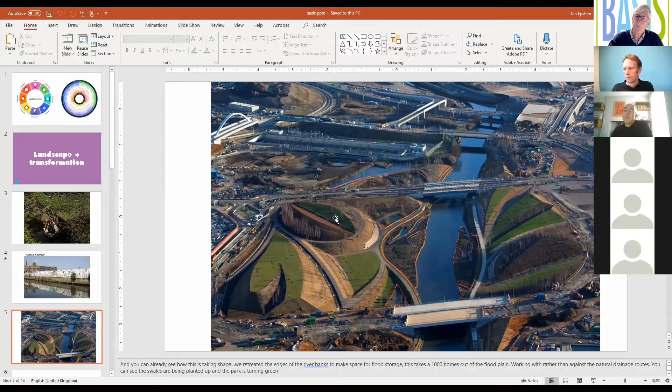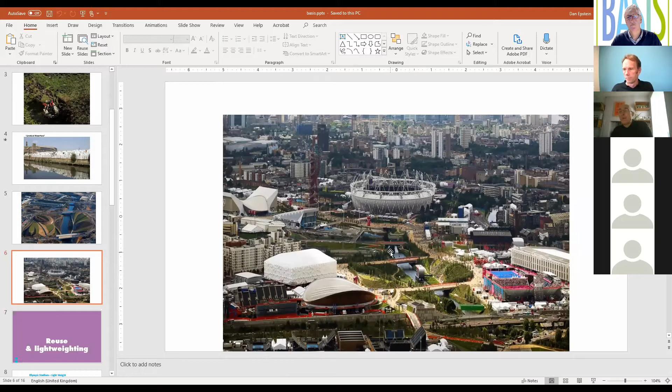It's connected, it draws people from all over the world. So it was really transformative, and that's an incredibly important part of this, the health and well-being agenda. And this is the backdrop for what I thought was a really successful Olympics—the park itself, the great legacy. So where better to put great sporting facilities than in the middle of a fantastic, vibrant park?

How do we build so it's really lightweight? This red outline is the Beijing stadium, an 80,000 seater stadium. The black outline is the Populous Stadium for London, also an 80,000 seater stadium, but it used a quarter of the materials. So we know—and Eva will talk more about this—we know we can build in a much more lightweight, but also much more robust way.

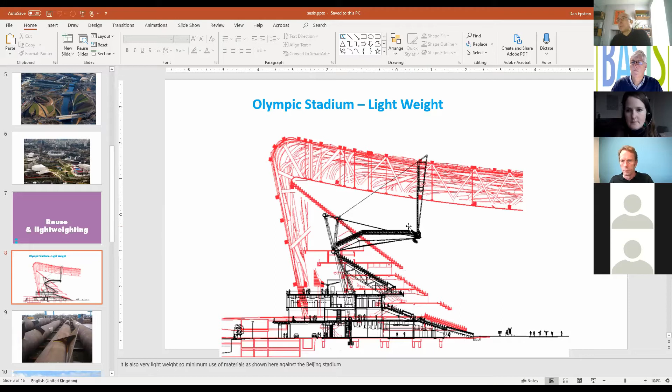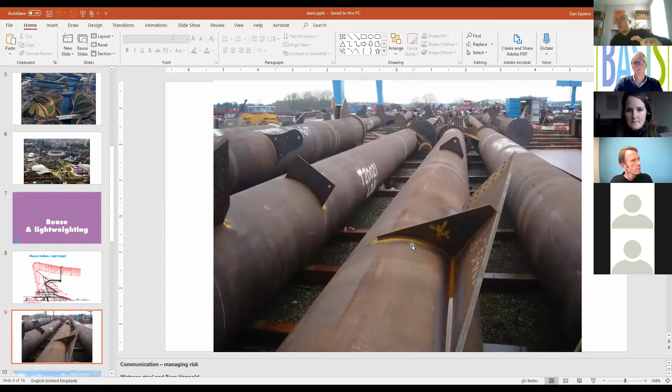It costs far less. We also managed, on the Olympics—and this is something I really think we need to think harder about—to require that 20% of all the materials we used would come from recycled sources. Here are some old gas pipes which were surplus to requirement, and they ended up being used in the ring beam and the exoskeleton for the Olympic Stadium. We reduced our carbon emissions and reused a huge amount of materials. That was just innovation and good design.

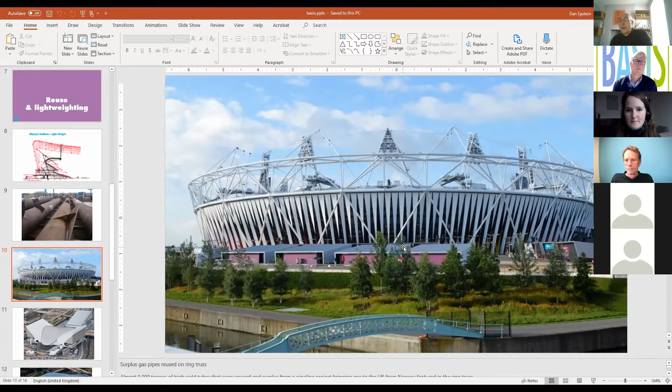Here we designed an aquatic centre with 17,500 seats. That's a requirement of the IOC. But afterwards, you look around the world and you only need 2,000 seats. So we designed it so those two wings could be taken away.

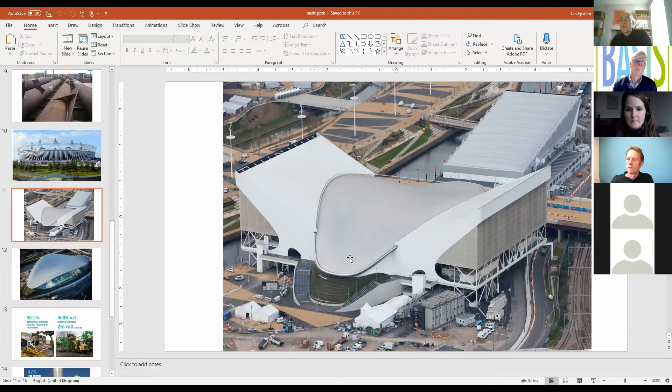And now they are part of the whole events world, where the seats are taken and used for temporary events, sporting events, and other cultural events around the world. They were designed particularly for that. And this is what we end up with, a venue which is brilliantly used by the community.

It's really hard over the last few months during COVID to book a place to swim at the swimming pool because it's so popular.

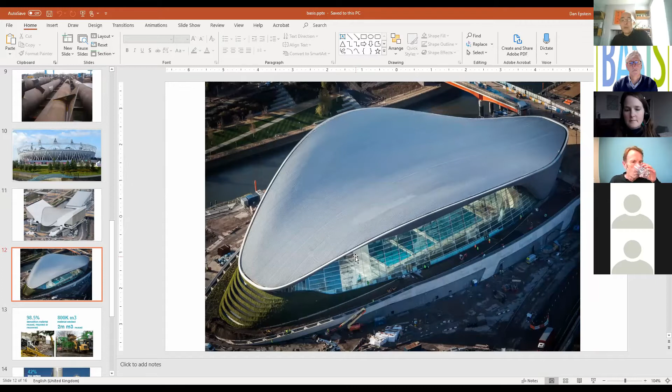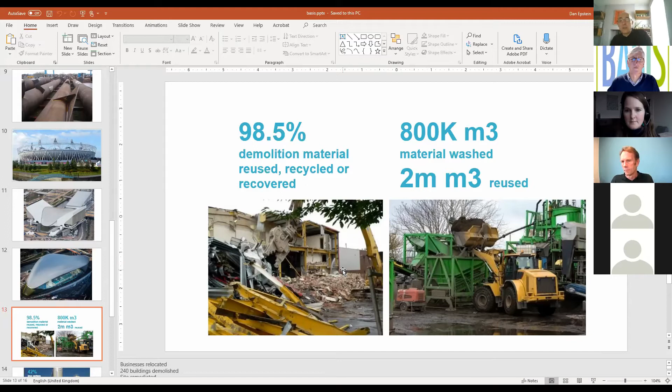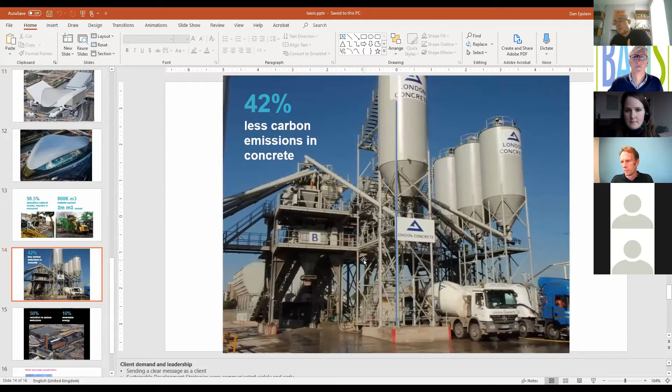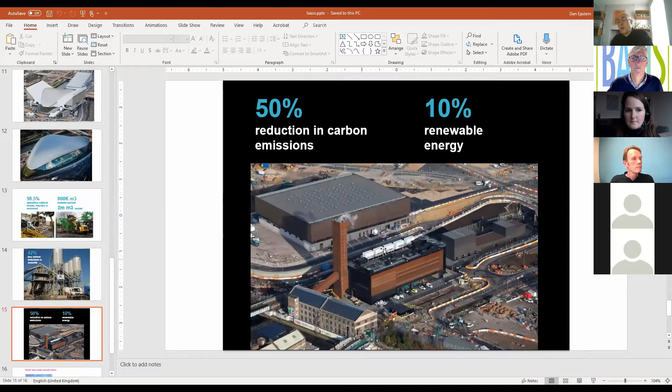We managed to create a heat network that uses free heat from biomass to provide heating, cooling and hot water to all the venues, and we used recycled water across the park. All these innovations and more were part of a whole ethos around how we build in a really sustainable way.

And I think the legacy is the beginning of a fantastic new neighborhood. Anyway, that was just really to get you thinking.

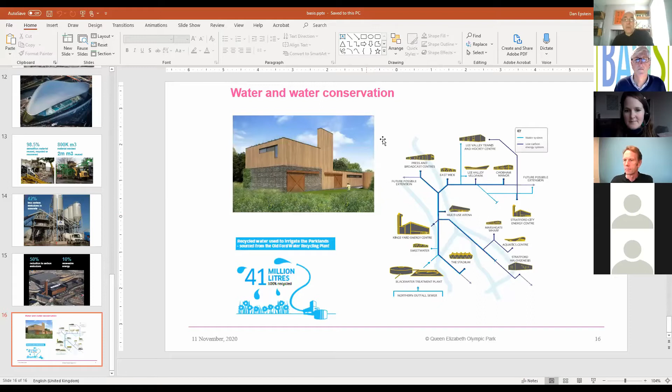Hi everyone, I'm Eva McNamara from Expedition Engineering. As Dan said, I've been working in low carbon design for a while, in particular in infrastructure, which is a great place to start because they've got a huge amount of money to spend on innovation, and we can take that learning and apply it to other industries. I'm just going to share my screen with you now.

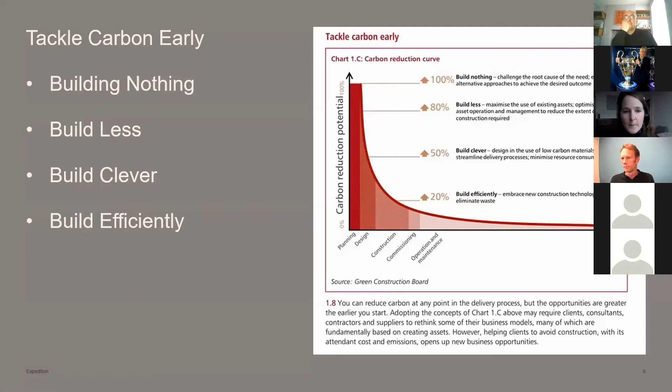So if you're going to build something, you do it as good as you can, embrace new construction technologies and eliminate waste. This is, I think, from the Green Construction Board documentation.

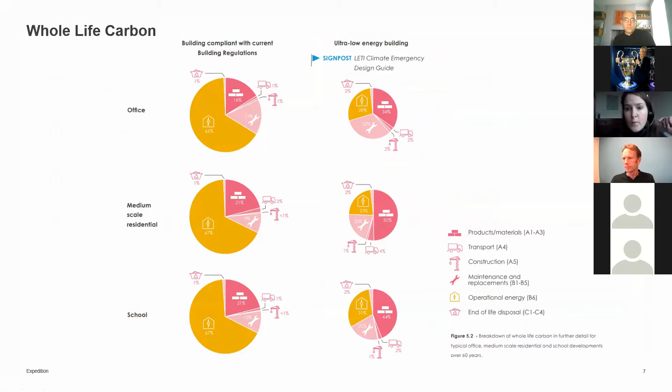I just want to make the point that as we make good moves in reducing our operational energy or decarbonising the grid, the overall whole life carbon impact of operational energy starts reducing as a proportion, and embodied carbon becomes more and more important and urgent for us to address.

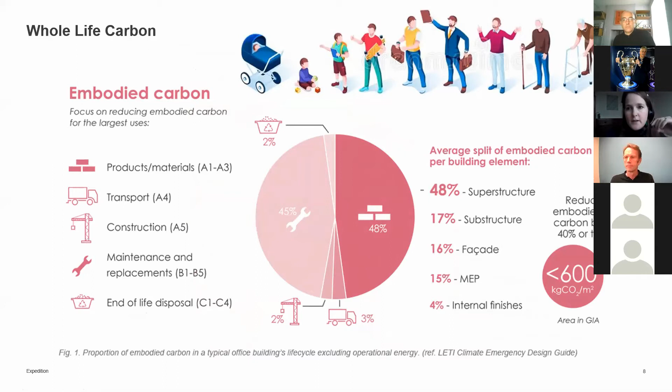Picking this out, for embodied carbon, I want to make the point that around 50% of embodied carbon is in the materials we build with to start with, but around 45% is in that maintenance and replacement afterwards. So we really need to be thinking about whole life when we design.

So I'm going to talk about all of these things in the context of the velodrome, which was one of the most sustainable projects on the Olympics. So we start with the brief.

Of course, any velodrome has two target user groups, those world-class cyclists and the spectators, and then a third group of people, those TV viewers. For the London 2012 velodrome in particular, there's a fourth set of people, the members of the public and amateur cyclists who will effectively be the main users of the project for most of its life in its legacy stage, as Dan mentioned with the aquatic centre as well.

So we have these two different groups with two very different needs. Cyclists want a hot and humid environment, minimal air movement, high levels of light evenly distributed, but they're only using it about 20 days per year, compared with the spectators, who are also legacy users, wanting something like 18 to 26 degrees, good air movement in the summer, and lower light levels also evenly distributed, but they're using it about 345 days in the year.

Quite a challenge here. So along with the rest of the design team, we were really keen to deliver sustainable design through a building based on true low energy design rather than a reliance on state-of-the-art renewable technologies. In fact, the velodrome has no in-venue renewables, which can be quite surprising for some.

So the resulting building easily surpassed the ODA targets, and I think it's generally acknowledged to be the most sustainable venue on the Olympic Park.

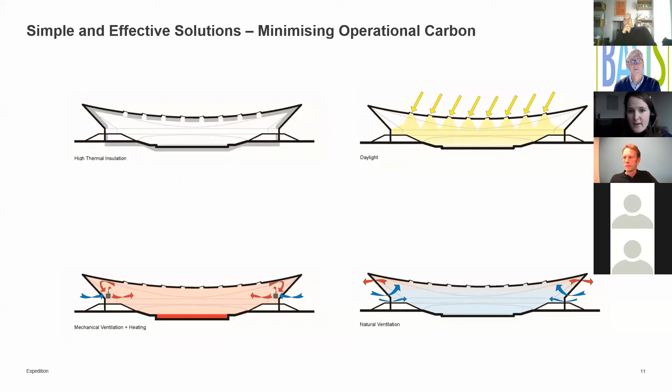The ODA required all venues to exceed building regs Part L by about 15%, I think it was, and the velodrome exceeds it by about 31%.

Embodied carbon, though, presents a more interesting challenge. Targets typically aim to lower the embodied carbon per tonne of material used rather than reduce the total quantities of material used in the construction.

So for the design team, with the idea of a racing bike in mind, the design approach followed the desire for lean design throughout, putting the right material in the right places and removing that unnecessary fat.

The external appearance of the velodrome is the result of shrink wrapping the skin onto the skeleton of the accommodation within. That minimises the internal volume that in turn needs to be heated, and it reduces the surface area and cost of the cladding.

So the roof form is generated by that tight wrapping, in the form down on the seating bowl, lifting up at the sides over the upper bowl and pulled down again tightly at the ends where the upper tiers aren't present, leading to that distinctive doubly curved form, or Pringle as you guys might call it.

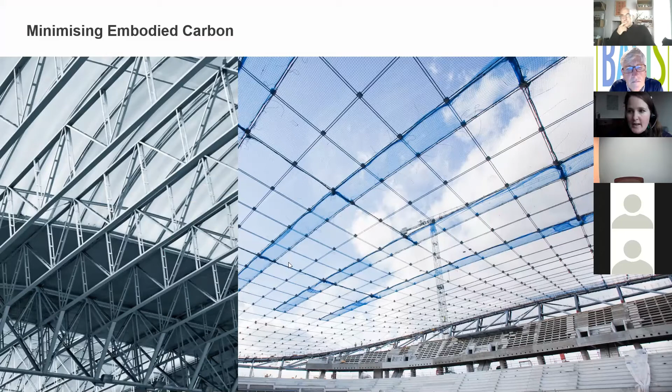However, early on in that design process, the economic viability of that cable net roof was questioned by the project cost consultants. And this is where it's really important in low carbon design to understand what changes we make impact on the carbon.

So from the client's perception of additional risk introduced by the relatively rare construction methodology of the cable net, the design team at the time were instructed to adopt a more traditional form, so those trusses. In response, a variety of alternative forms were assessed, including timber and steel arches.

The project was procured using a two-stage tender process, and at the time it was RIBA Stage C documents that formed that first stage tender pack. We showed a steel arch scheme with the main arch members being of a depth of about 1 metre. Compare that with how little material you're seeing in a cable net.

But a supportive contractor, ISG, identified a 3-month programme benefit with the cable net scheme and was subsequently awarded the contract. So over the course of the next couple of months, the design was significantly modified back to accommodate the reintroduction of the cable net. And that change saved 2,700 tonnes of CO2 equivalent and was successfully completed around 6 months ahead of other venues on the site.

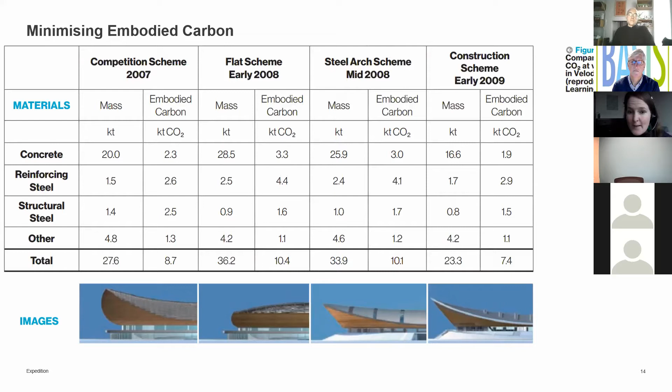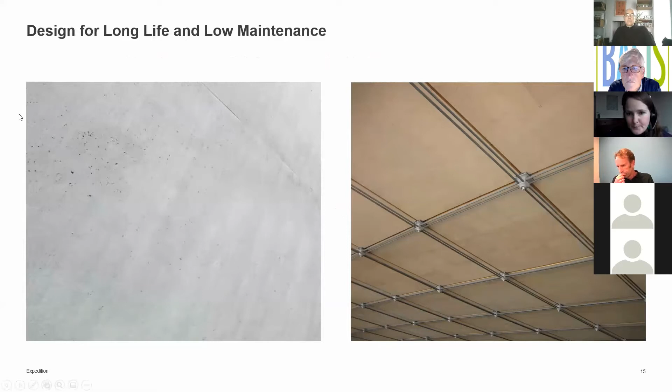So minimising embodied carbon - the continued tightening of the Part L regulations, like I mentioned before, has forced designers to reduce operational carbon emissions. And that has had the effect of increasing the relative contribution from embodied carbon. So therefore, when we're considering low carbon design, the role and influence of the structural engineer becomes increasingly important.

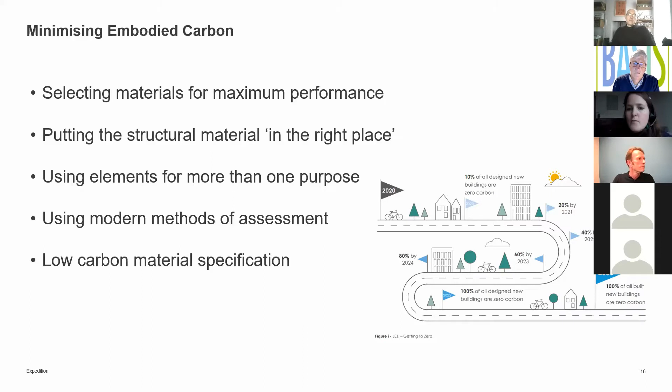And the design response for the velodrome focused on this in the following ways: selecting materials for maximum performance, including weight, strength, stiffness, lifespan, thermal mass, and embodied energy; putting structural material in the right place, so lightweight design; using modern methods of assessment, for example using the Institution of Structural Engineers report on crowd dynamics to justify the building as is, rather than stiffening it up to achieve high historic vibration limits; and low carbon material specifications, for example specifying concrete with a high cement replacement, and that sort of thing.

I don't have much time to go deep into water design, but I just wanted to make the point that in design and build, we should be putting our efforts into the places that matter, not doing things that don't really make sense. An example of this is in water demand.

Residential buildings, schools, those sorts of things have a relatively constant use, which you can see in these diagrams. And so does a well-programmed leisure and community centre. But event venues obviously have big peaks and troughs. So that's where you go for putting in place strategies like rainwater harvesting for the more constant usage requirements, because you'd be able to design in line with a fairly constant usage. Event venues don't offer that same consistency.

So with event venues, it's probably better to focus on efficiency above all else. That's one for debate - different people have different views on that.

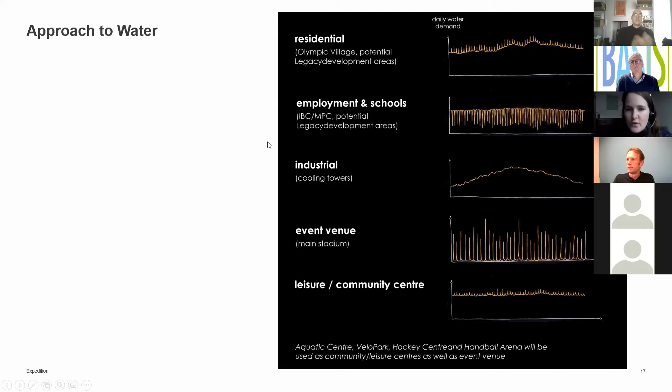Just to summarize, sustainability from every angle: it achieved BREEAM Excellent. On energy and carbon efficiency, the CO2 output was about 31% below the building regulations Part L requirement, and we saved 2,700 tonnes of carbon equivalent in the roof.

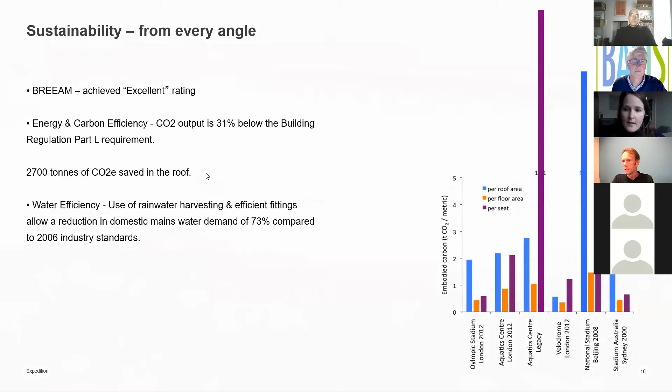And on water efficiency, a limited use of rainwater harvesting and efficient fittings meant that it was about 73% below industry standards at the time. So the velodrome's been really well received with the client, the ODA, and obviously the legacy user, the Lee Valley Regional Park Authority. And the building, I suppose, in summary, is a combination of simple technology that cumulatively has produced an exciting building with cycling at its centre, and that's its success.

So I want to show something now at a different end of the scale, not associated with the velodrome, but thinking about how we design for those kind of peak usage moments. How often is a stadium fully loaded? Maybe 20 times a year for 90 minutes on a Saturday, something like that.

And when we design, there are two key things. We design for strength - we obviously don't want our buildings to fall down - but we also design for stiffness. So what I mean there is kind of movement and comfort.

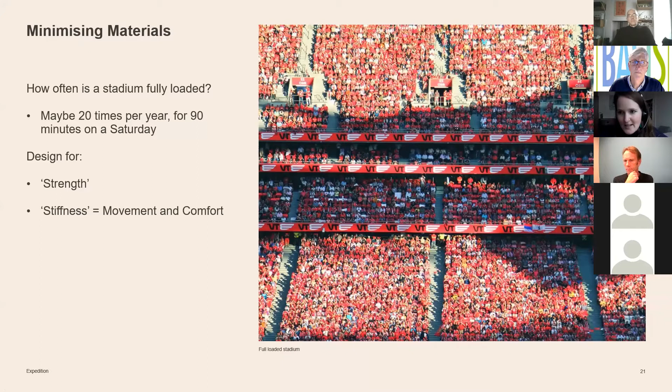When you're walking on it, do you feel it vibrate? Does it move down significantly when someone loads it? That kind of thing. So obviously we need to put in enough materials to stop a building failing, but often, particularly on large span structures, and this is where it's particularly relevant to sports systems, we're putting a large amount of material in to increase the stiffness of these buildings.

But if we make a step change in the way we approach design here, we could use an adaptive system. Just an analogy here: if you were pouring a cup of tea from your kettle into the teacup, your arm doesn't rise as the water pours out. Your muscles are constantly adjusting to keep that kettle level. So what you're doing is using an adaptive feedback system to keep the loads regulated and your position in the same place.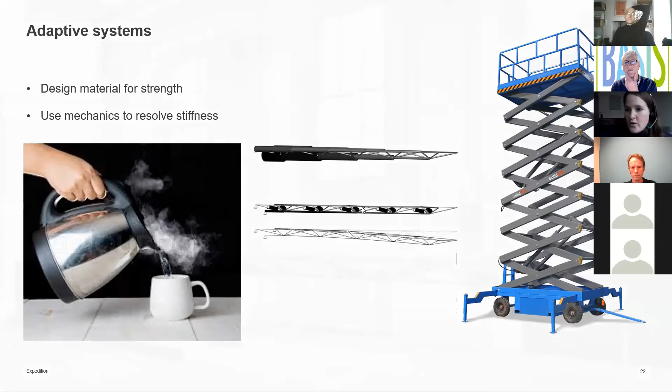So with Gennaro Senatore at UCL, we looked at the opportunity to design an adaptive truss. Here we've got a bunch of actuators in the truss system. Think of a simple scissor lift, where these actuators expand or contract the structure. We built a prototype of this, a 6 meter long cantilever, about 6 times more slender than it would be otherwise. You can see here these actuators, which help change the form of the structure.

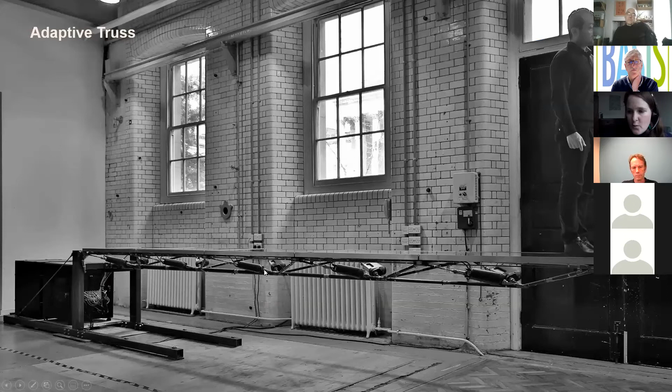So I'm just going to show you a little video here. The actuators are on, keeping him level. And then when they turned off, this is how the structure would have deflected if it weren't using this adaptive feedback loop. And there they are back on, so they've corrected for him to be level again.

So that adaptive truss is 80% lighter than a conventional equivalent structure would have been, 6 times more slender. And I hear you shout, but surely it uses operational energy to keep it in place. And of course it does. But on a normal use day, the electricity consumption is less than a watt, because those actuators and control system only activate for high infrequent loads, say a high wind load, or a situation where the stadium is loaded to its full capacity. So whole life energy, embodied plus operational, is 60 to 70% less, and it contains a worm drive system. If there's a power cut, it automatically locks the actuators in place, so there's a fail safe.

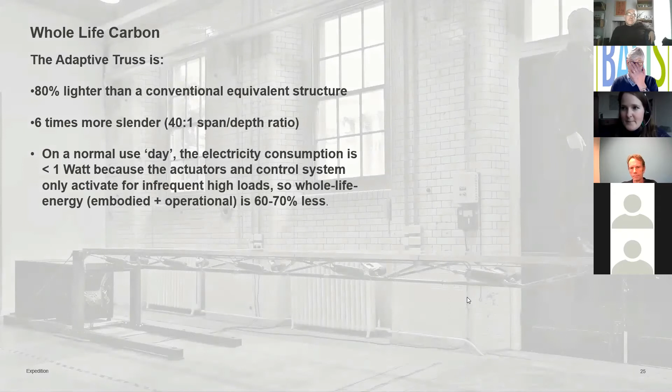So on to materials separately, just to rush through this. I'm working with Network Rail at the moment on low carbon design, and the funding they're putting into low carbon innovation is fantastic. One of the things they're doing is putting the proof in the pudding, building something like £1 million worth of low carbon copers, with the stretch target that we can make them net zero, and it looks like we're going to get there. When we do, that's the sort of thing that should be rolled out cross industry.

I think in innovation in materials, what we need to do is not just say we want to replace like by like. When we discover something new, like earth-friendly concrete, a geopolymer concrete, it's got a different kind of strength, which means we might be able to get rid of the reinforcement, which is the thing that often makes structures prematurely degrade if they're not looked after. So actually it's a double benefit, because you've taken out the thing that reduces the life of the system.

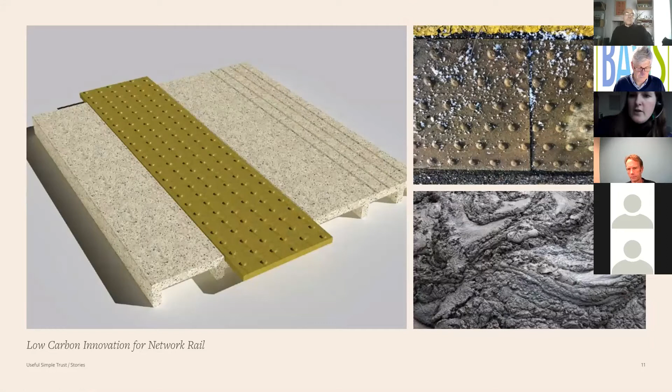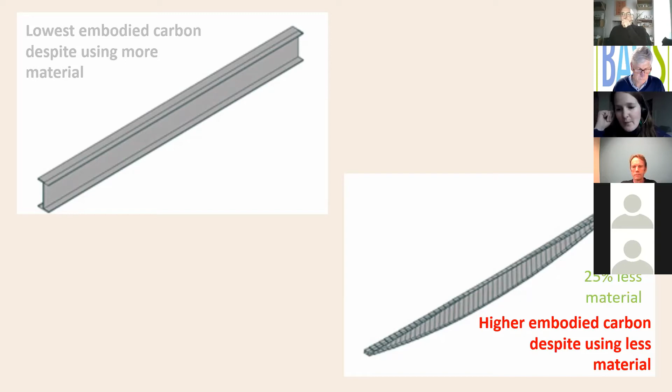So there's a lot to think about, and the takeaway points are: take a whole life carbon approach, tackle carbon early, adopt low carbon principles from day one, be a good client and set a good brief, consider the impact of value engineering, like in that cable net example, and ask questions of your design team. I'd put it back to you now - why, if we have many of the answers which Dan's shown, I've shown, and my colleague speaking later will also show, are we not deploying them at scale? That might be an interesting thing to discuss in the chat afterwards.

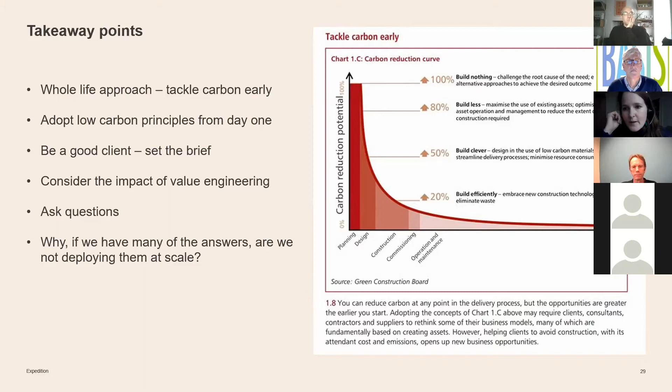But just in response, the other thing we're thinking about is there's a huge amount of risk in many of the things Eva was talking about, and that's just the nature of innovation. One thing we haven't really talked about is how we overcame risk on the Olympics - it was interesting, but we're not going to pick that up right now. Have that in the back of your mind though - you've got to be prepared to test new things if we're really going to meet the big agendas. Anyway, over to Jonathan.

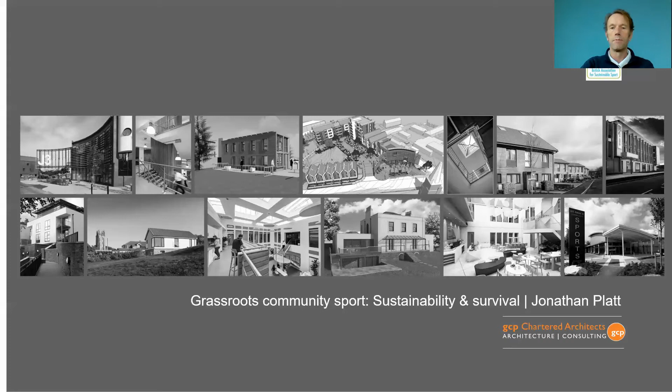Hello and good afternoon, my name is Jonathan Platt. I'm a director and architect of GCP Chartered Architects in Bristol. We're a small architectural practice based in the Southwest, predominantly working in the Southwest, but occasionally we get opportunities to work wider afield. We've been involved with grassroots community sports since the launch of the Lottery Sports Fund in 1994. At that time we were working for David Lloyd and a few other commercial operators, but since then our work has predominantly been with grassroots community sports organisations in and around the Southwest, but also occasionally working more on a national basis, principally for the ECB on a number of programmes.

There's a couple of things I'd like to talk about principally today, and it's the balance between new build and refurbishment when we're thinking about building back for a better future. My issue here is that we've got a huge amount of existing stock that needs attention, and I think we should only build new when we're sure the existing stock has no further purpose. Having said that, we are involved with new build, and the scheme illustrated here was actually the UK's first BREEAM Excellent sports centre in the country, built at the beginning of this century, funded via the Lottery Sports Fund and the Southwest RDA. The other thing I want to talk about is how we fund development going forward - this is going to be extremely difficult post COVID-19, and those are a few of the takeaways I hope to be offering at the end of this talk.

So just casting back quickly to 1994, the start of the Lottery Sports Fund - what did we have in terms of grassroots community sports facilities? Well, I think they were pretty underinvested.

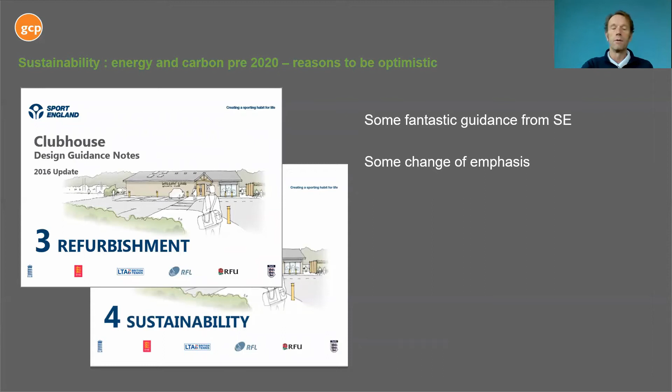I think there's been some other really interesting developments by Sport England and their partners, and these are reasons to be optimistic that actually sport and exercise is a much broader thing, and it can be part of everyday life for a far greater group of people. I think the whole idea of active design is something I'm really interested in, and how we can integrate that into our communities. And now we've got some great data, from the facilities planning model etc, to help guide where our investment might go, or where the country's investment might go. And lastly, the community asset transfer - there is some really helpful guidance there. But the challenge is actually seeing that through, and ensuring anybody who takes on an asset transfer isn't unduly compromised by the transfer process.

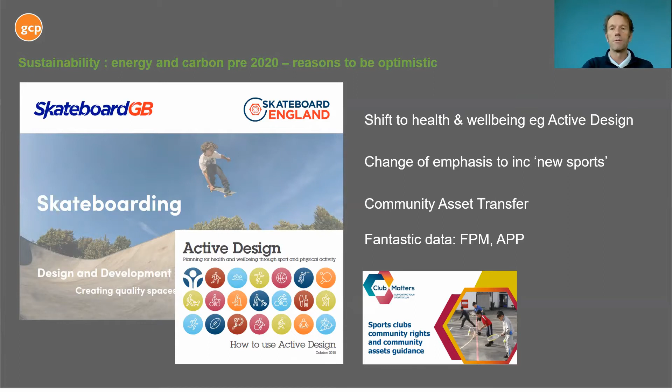I mentioned earlier that there had been lots of lobbying and persuasion of government to put the green agenda higher within the legislative calendar. Well, despite all the lobbying and years of pressure groups, it took a teenager from Sweden to put climate change on the agenda. This is now a global movement. Her tenet was that current commitments are inadequate, and she used peaceful persuasion and brought young people out on the streets, which was a really interesting thing to see. So climate change is now on the agenda. It was brought even more into focus over the last couple of years with Extinction Rebellion, and the direct action rather than the quiet persuasion of Greta.

These campaigns cannot be ignored if you're in central London. So it's really on the agenda now, and governments are starting to take note.

The other thing that's had a massive impact, and we're seeing it now in local authority investment decisions, was the whole climate declarations movement that started in Australia. Bristol, interestingly, was the first UK city to declare a climate emergency, and now more than 400 civic authorities have taken up the campaign. I think a climate emergency now trumps planning policy in terms of driving local authorities' decision making.

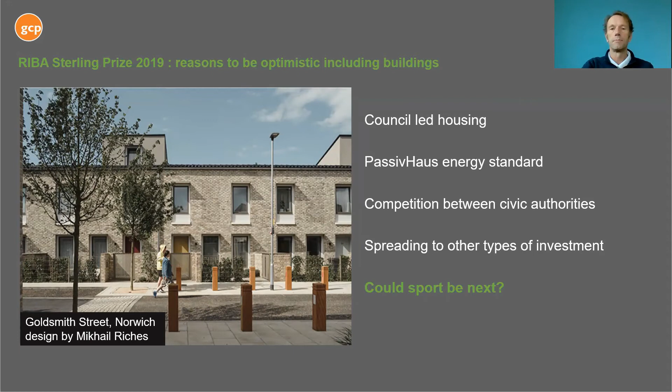So those were some reasons to be optimistic. There are some reasons to be a little bit pessimistic.

But it's also a threat to organisations. So it's not just individuals' activity levels, but are people going to go back to clubs? Are people going to go back to clubs and pay their membership to allow those clubs to keep the doors open and the lights on?

But having said that, maybe it also forces us to think about things a little bit differently. The high street isn't going to go back to what it was before. So why should community and grassroots sports go back to what it was before? Maybe there's an opportunity to think about how things are organised and whether we can do things better.

So I've got a couple of case studies here that I'd just like to quickly run past you. This is a new build case study, which I think is a bit about old thinking.

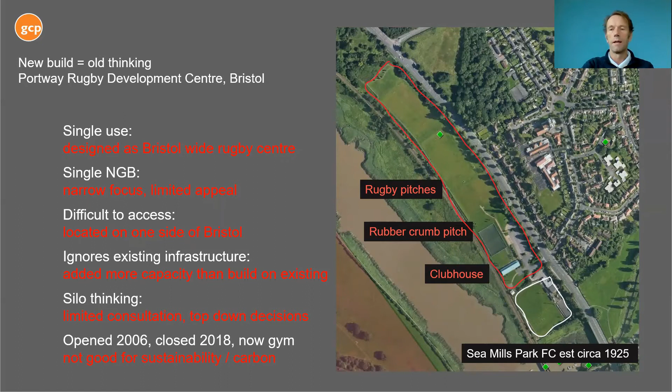Moving on to something that I think is a better example of investment, and it's something fortunately that we've been involved with. This is about refurbishment, and it's about new thinking—looking at assets that are already within communities, appraising them and saying, well, if they're not quite right for today, what do we need to make them better for tomorrow?

So here we worked with a client, Waltham Forest Borough Council, and the ECB, England and Wales Cricket Board. This was the first project where the ECB's urban cricket programme was introduced. One of the key tenets of this project was to build in maximum flexibility. We were involved with phases 1, 2 and 3.

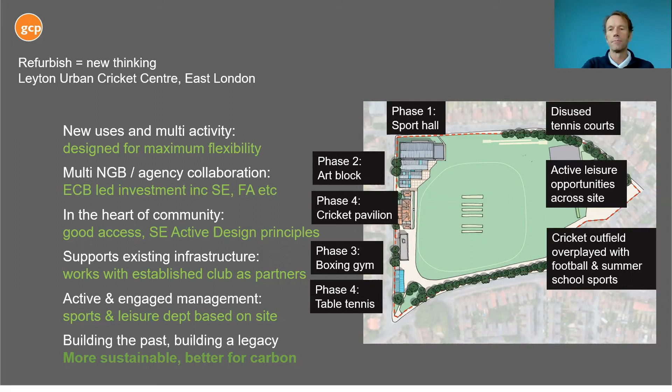This is the site when we arrived: the main pavilion on the left-hand side, the arts block, and the sports hall on the right. On the left we've got the existing sports hall and former arts building, with the pink being the bits we were going to build as new build to link them together. On the right is the early stage sketch scheme proposals around how we would integrate those two buildings, bringing as many different uses into them so we have occupancy throughout the day.

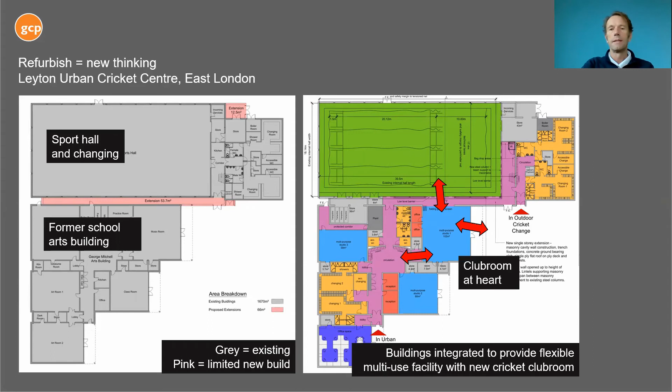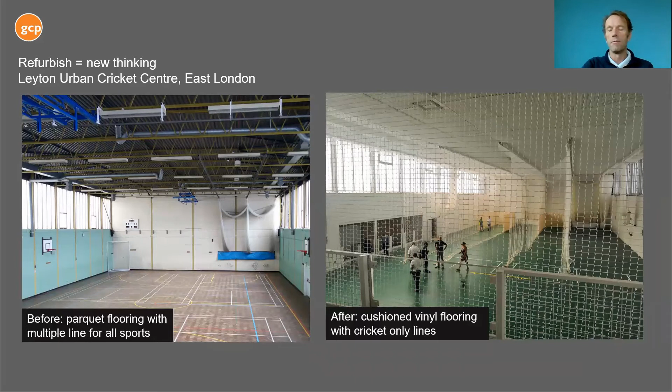Sports hall as it was and as it is today. The sports hall on the right links through three glazed doors on the left-hand side into the arts block, so there's a physical and visual connection between the two. With a little bit of work we transformed the showers, and there we are at the end of the day—a bit of a light touch external transformation, but actually the money was spent indoors.

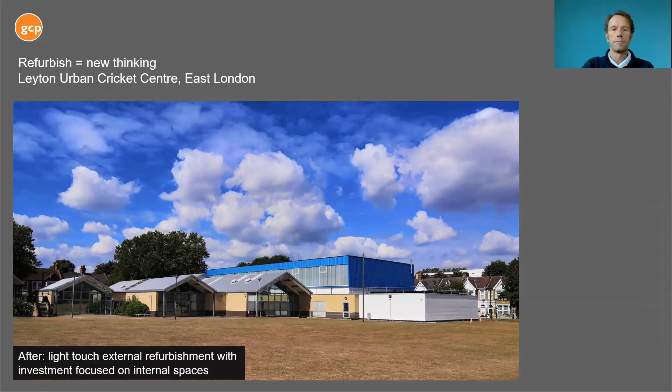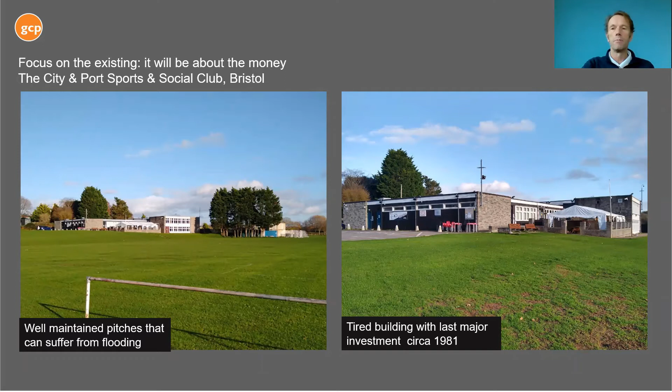The tricky thing is where is the club going to get the money? It's a great site on the River Avon, a great opportunity. At the moment it just really focuses on football—there's not much else in terms of sporting activity, but historically there've been tennis and cricket, and there is a relatively active external grass bowls area.

Within the building there is opportunity to create more sports facilities, and the club are very keen to expand the daytime offer, creating a community hub with a creche, co-working, and other activities that bring people there during the day. They also want to add gym facilities, looking at what they could do beyond their red line boundary into adjacent areas—rewilding and nature hides on the right, bringing more people to the site, and a recreation garden on the left, generating more reasons for people to come and use their facilities.

The tricky thing is where they're going to get the money. There are flood defence works proposed along the River Avon, and interestingly in Bristol there are policies around letting public service contracts, with a social value calculator they use. If we can get it written into the contract documents that contractors need or could use this site for their construction compound—not for materials, but for welfare for all the workers—the cafe and coffee shop within the club could benefit from serving breakfasts and lunches. That would make a huge difference to the club.

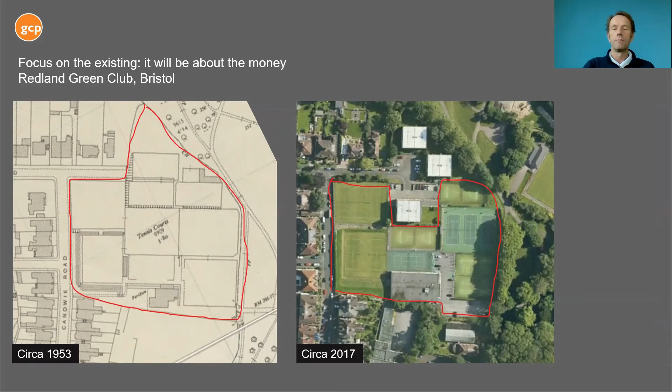The club was a pre-Wimbledon venue when it was all grass courts, and as we can see at the bottom now, some of the grass courts have been taken out of use and are completely unplayable.

There's been extremely complex land ownership over the years because the club has been in lots of different owners, and previous owners thought they were going to secure the site for residential development when the club failed. Fortunately, through the works of members over the years, they've managed to wrestle back control. They're now going through the final stages of changing the legal structure to ensure it will be held for the benefit of members in perpetuity. But it's been a long journey to secure the rights to control their future.

Really interestingly, out of the 13 courts they have, 5 are unplayable on the left-hand side. They're still surfaced as grass. Of the remaining 8 courts, only 5 are to LTA standards. There's a real issue with the connection between the club and the courts, where actually you had to walk across the car park.

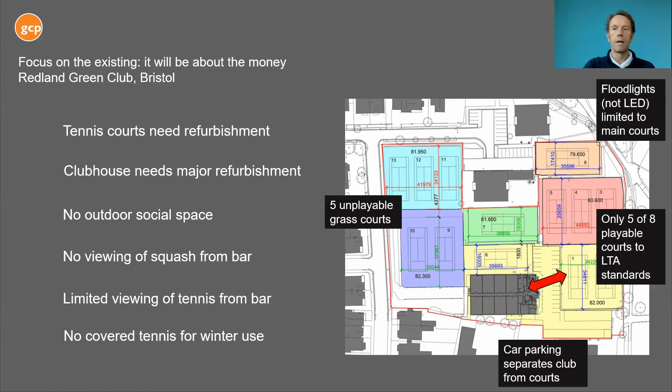There's a first floor bar and recreation area which overlooks some of the courts, but it actually has no viewing of the squash whatsoever, apart from a small balcony. And there's no covered tennis for winter use. Having 2 or 3 David Lloyd clubs in Bristol, 2 of which have covered tennis, this is an issue for any private or community club in the city.

So in line with local authorities' thinking, we wrote a strategic development plan for the club, which looked at a 50-year horizon: how do we make this club good for the next 50 years? The strategic brief has been used to guide all decision-making, and the decision was there was going to have to be some selective land sales to be able to fund the investment needed to secure the club for future generations.

The focus of the strategic brief was that we should look to reuse and refurbish wherever possible - not building outside the envelope of the existing building, and focus on making the existing building work better and work harder throughout the day. We were going to do that by overcladding the building, filling the roof with PVs, moving the recreation area from the first floor to the ground floor, allowing that to open out into the area where the car park was, and create more direct connection between the social areas and the playing areas, both for the tennis and for the squash.

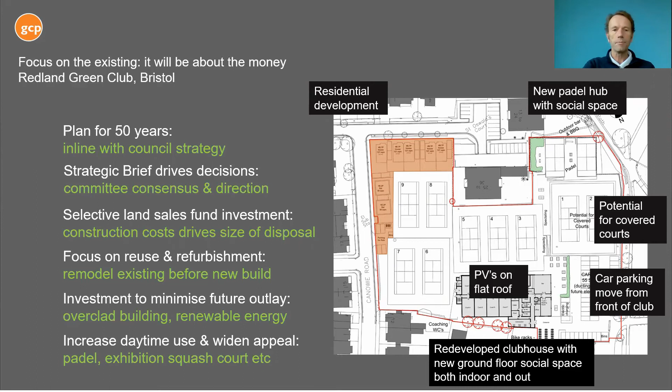So in summary, what can we do to bring forward better investment in terms of sport? These are my questions to you. How can we use the climate emergency declarations to actually drive investment decisions by local authorities? If you don't know if the local authority has declared a climate emergency, please go and find out.

Another issue I've come across - how can we tie planning obligations to higher standards? Hopefully the other presentations within this session will help answer some of that. Also, how can we incentivize the payouts from 106 or CIL to insist on higher standards? Can we link those payouts to local authorities where they've declared a climate emergency?

How can we lobby for investment to be tied to higher performance standards? Do we do that through working with the NGBs? Do we do that by lobbying our politicians? I don't know what the best route is, but we need to tie investment in sport and leisure to higher environmental performance. I think we can build back better, but only with a more collaborative and shared vision on what that future might look like.

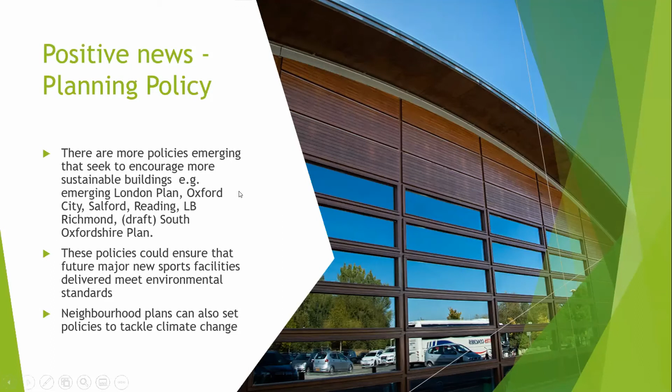Neighbourhood plans can also set policies to tackle climate change and ensure that planning policies in the future mean major new sports facilities will deliver and meet environmental standards, like the examples we heard about earlier in the presentation.

I'll just quickly tell you about the draft London Plan, for example, whose requirements now include that major development should contribute to the greening of London by including urban greening as a fundamental element of site and building design, for example green roofs and green walls.

Another example is South Oxfordshire, where in their draft policies, large non-residential development proposals are required to meet the BREEAM Excellent standard, in addition to achieving at least a 40% reduction in carbon emissions compared with the 2013 building regulation base case. That was taken from the Oxford City policy, which is adopted.

In both cases, the councils had to evidence at their hearings that this would be viable for developers to deliver, so it's much more difficult for them to get out of delivering on that standard. It would apply to large sports developments that met the criteria, such as non-residential over 1,000 square metres.

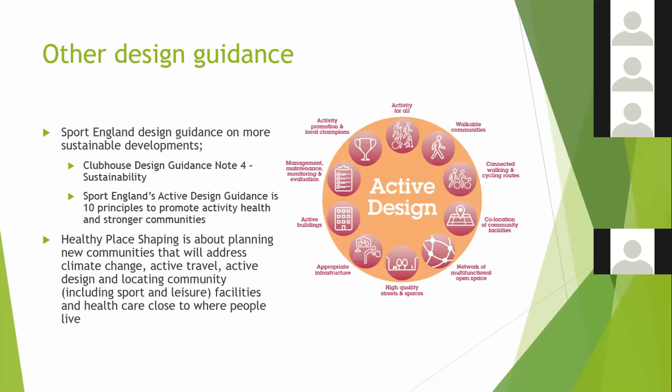As I mentioned, neighbourhood plans can also set that type of policy. Another emerging policy area, which Eva mentioned earlier, is the circular economy, aimed at eliminating waste and enabling the continual use of resources, as an alternative to a traditional linear economy. The draft London Plan is requiring some large development applications to submit a circular economy statement, and the Mayor is developing guidance on circular economy as well. So that's definitely a key area that's been coming forward.

I just wanted to mention, in relation to policies, that the government is currently intending a radical overhaul of the planning system, and there isn't time to go into that here. But we'll have to wait to see if things change and more requirements come in to encourage BREEAM Excellent standards or Passive House or similar through national guidance. The government has said they will have an environmental consultation in the autumn and will update the NPPF, so we may see changes coming quite soon.

It's also worth mentioning there are proposals to move from local authorities setting infrastructure levies themselves to a national infrastructure levy. So again, that could mean less money potentially going into sport. We'll just have to wait and see.

Before I finish, I wanted to speak about Sport England design guidance, and Jonathan's already mentioned the really good sustainability clubhouse note. Just to pick up on Sport England's active design guidance, it's 10 principles to promote activity health and stronger communities, and that's the diagram for that you can see on screen.